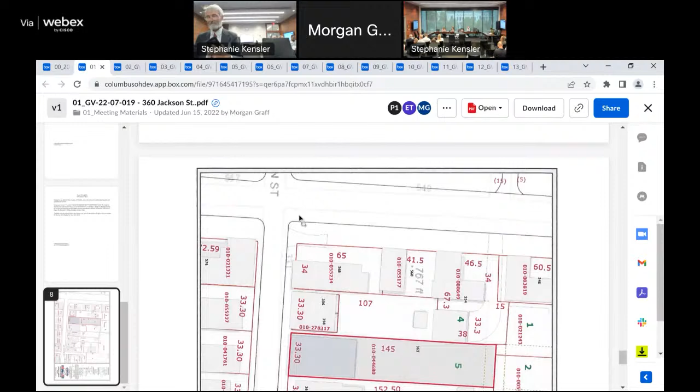Thank you, sir. Morgan, proposed work description for this application is for variance recommendations. They will be CC 3332.031A to allow a 3-unit dwelling structure, CC 3312.49B to reduce number of parking spaces from 2 to 0 for the third unit, and CC 3332.14 R2F to allow a 3-unit dwelling on a lot of less than 6,000 square feet.

Single-family home was converted into a 2-unit dwelling around the 1940s, which is indicated as COA for variance recommendation in 1979, COA number 19475. The existing awning was installed in 1988, COA number 88516. This applicant was reviewed in May and received a recommendation for commission, COA number GV 2204020, after being continued from April. The applicant has returned with an additional variance recommendation needed before they can proceed through BZA.

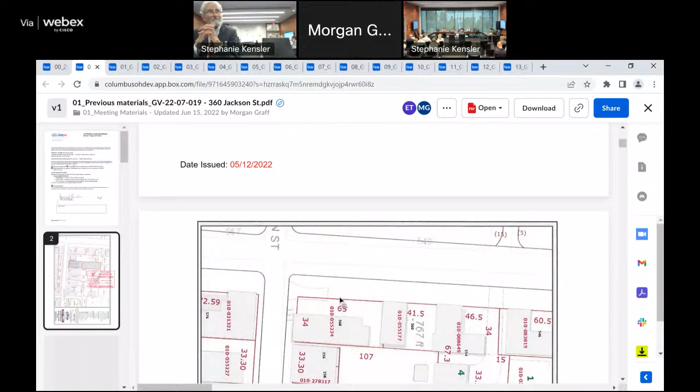The new variance is the CC 3332.14 R2F to allow a 3-unit dwelling on a lot less than 6,000 square feet. Staff recommends that the commission recommend approval to the BZA as submitted. Basis of the staff recommendation is the proposed work is consistent with German Village guidelines. Zoning variances, page 139.

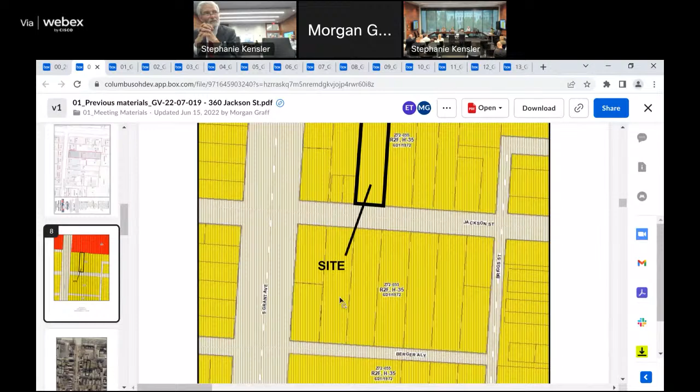Thank you, Morgan. Thank you. Anything to add? Nope. Once again, we were before you in May, and staff had said that was the only 2 variances we need. And as they were writing the ordinance, it went up the food chain, and somebody made a determination, although you all had recommended approval for 3 units on a lot of 0.11 acres, which is less than 6,000 square feet. They said they did not actually vote on that specific variance.

So I'm back in front of you all asking for that specific variance. Essentially the same thing as what we approved in May. Nothing has changed, it's reiterating what was already approved.

Commissioners? I move on application GV 22-07-019, 360 Jackson Street, to approve or recommend as submitted. Second. All those in favor? Aye. All those opposed, same sign. Thank you, folks. You're welcome. Thank you.

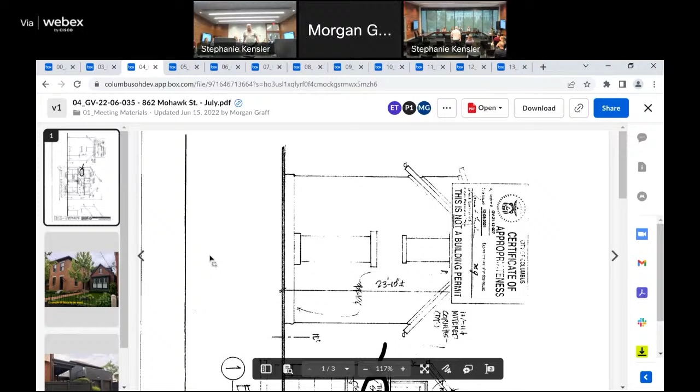Moving ahead to item number 4, this is a continued application, GV-22-06-035, 862 Mohawk Street. Please raise your hand. Do you swear to tell the truth, the whole truth, nothing but the truth? I do. Bill Hugus, architect.

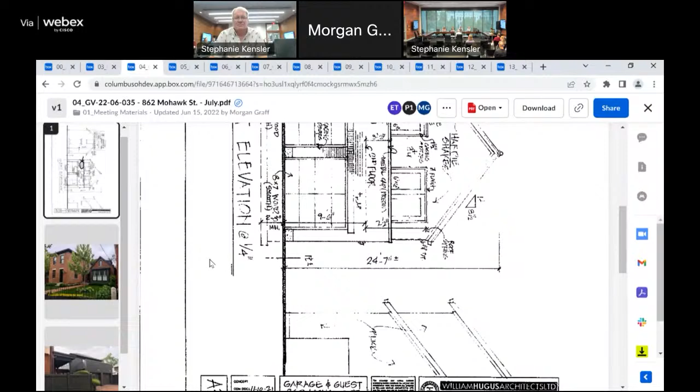Thank you, Mr. Hugus. Proposed work description: a new garage was previously approved in December 2021, number GV 2112-027. Previously approved design included natural brick on the east elevation. Applicant is proposing to paint previously approved brick in lieu of leaving it natural. At the past June business meeting, commissioners asked applicant to clarify what type of brick was originally approved in December 2021. Applicant responded stating that they will be using a thin brick series of Glen-Gery OSU blend.

Staff does not recommend painting brick, though it is part of the new construction. Basis of staff recommendation is German Village Guidelines, Masonry, page 38, number 6. Anything else to add? No, on the original approval I still prefer the natural brick, but there's an interior designer involved now, and she's insisting on trying to find out if we can paint it, because I think primarily she wants to change the garage doors that were approved. I don't know what to yet, so this is the first step in the question.

Questions, comments from the commission? You know, guidelines say don't paint masonry that hasn't been painted.

Questions, comments? Is the fact that it's a new brick, thin brick, have any bearing on your decision? No, because that was the original intent of the material, was to have a brick up there and be the color that it was. My point.

All the neighboring buildings are brick. That's why I prefer to keep it natural, so. And that was the intent originally. Yeah, just like the ones that were built 100 years ago, the intent was. Unless they were soft brick.

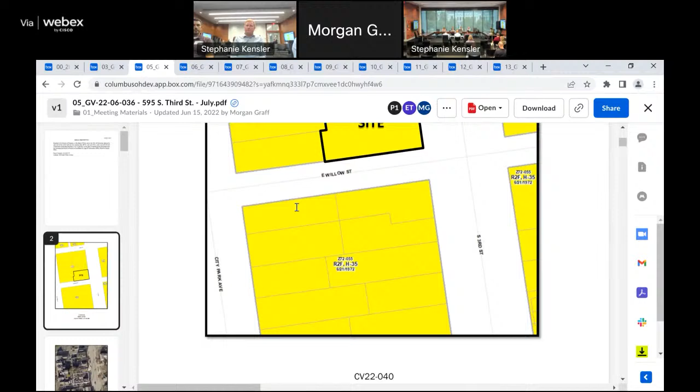332101, dumpster area, to eliminate vehicle maneuvering area for dumpster enclosure. 333218D, lot coverage, to increase permitted lot coverage from 50% of the total lot area to 70% of the total lot area. 3332037, R2F permitted uses, allow office, restaurant, and restaurant patio uses.

333221, building setback, to reduce the building setback from 10 feet to 0 feet from South 3rd Street and East Willow Street. 333225, maximum side yards required, to reduce from 16 feet to 0 feet, existing conditions. 333226, minimum side yard permitted, to reduce from 5 feet to 0 feet, existing conditions.

Outdoor patio design application was originally approved with variances recommended in April 2022, COA numbers GV2204026A and GV2204026B. Application has returned due to additional variances needed as well as revisions to the previously approved variances.

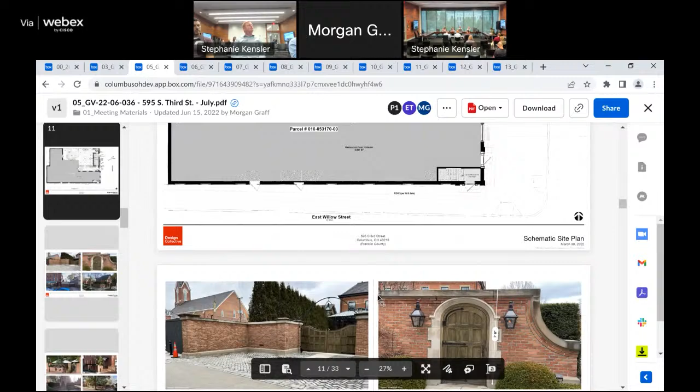The new variances include 333226, minimum side yard permitted, and 333225, maximum side yard permitted. 331249, required vehicle parking, was previously approved but revised to be 77 parking spaces required instead of 73, as well as 333218D, lot coverage, which was previously approved but revised for the existing lot coverage area to be 70% of total lot area instead of 63%.

At the past June business meeting, the Commission asked the applicant to verify if variances 333221 and 333237 were existing conditions. They also asked if the applicant has arrangements for additional parking off-site.

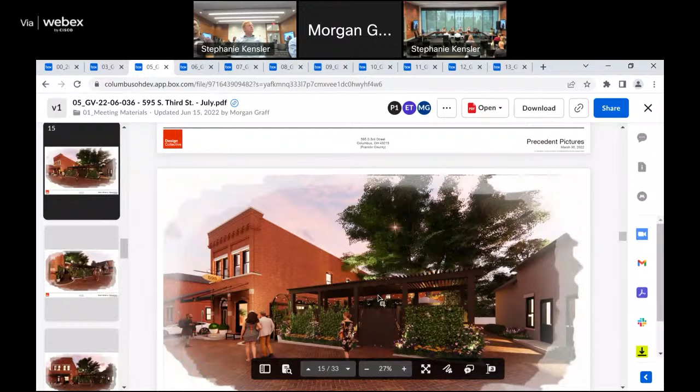Staff recommends the Commission recommend approval to the BZA as submitted, with the clarification that the final submittal packet for the previously approved design and materials be finalized for final Historic Preservation Office approval before issuance of certificate. Basis of staff recommendation is German Village Guidelines zoning variances, page 139: a standards variance grants permission to vary from established development standards regarding setbacks, side yard minimum sizes, and maximum coverage of a building lot.

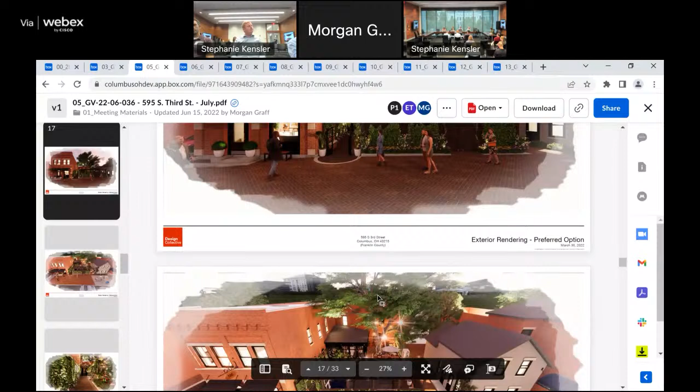Right, anything else to add? Yes, please, Morgan, if you could go to any of the site plans. So what we're presenting today is the same as what we presented to you back in April.

The reason for the increase of parking spaces and building coverage is that originally the laundry area, on the structure towards the front of the building, was not originally included within the calculations. This is to fix that oversight. With respect to the other side yard variances, those are existing conditions that we're just trying to bring in for the sake of clarity and records going forward. Those are the basis for the increased variances we're presenting today. I'd be happy to answer any questions.

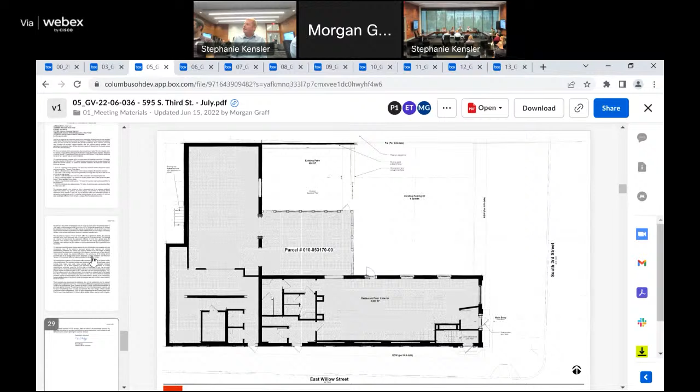I don't know if this is the correct illustration, but you said something was not included in the original. Morgan, if you have any— page 11, I think, is the one you want to look at. I'm not actually in control right now. Oh, my helper is back with Stephanie. Page 11.

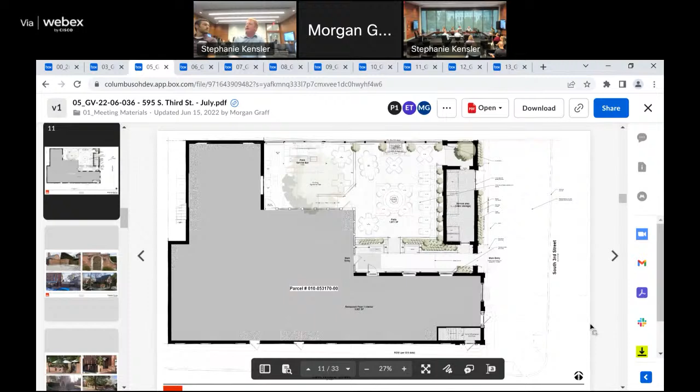So the structure on the right side, it's about 265 feet, and technically it's part of the restaurant use, and it's also building coverage. The variances presented to you back in April did not consider those in the lot coverage and parking requirements. So that's the purpose of this correction today. Okay, understood. Thank you.

But to clarify, the R2F permitted use variance is already operating in that capacity, so it's protected as existing condition. Building setback, existing condition; the side yard required, existing condition; the minimum side yard permitted, existing condition. So really we're just asking for a tweak to lot coverage, the dumpster, and the required vehicle parking change. Correct. Any questions, comments on the proposed variances?

Mr. Chairman, on item 5, GV 2206-036, 595 South Third Street, I move to recommend the variances requested. Second. And clarification to fix the bad calculations from before.

As far as the staff recommended condition about the single packet - we just haven't finalized the design with the applicant yet. We received those a couple weeks ago and we're still in communication on that. So I guess we'd wait to issue the certificate until the design is finalized, and the condition applies then. Yes, if that makes sense.

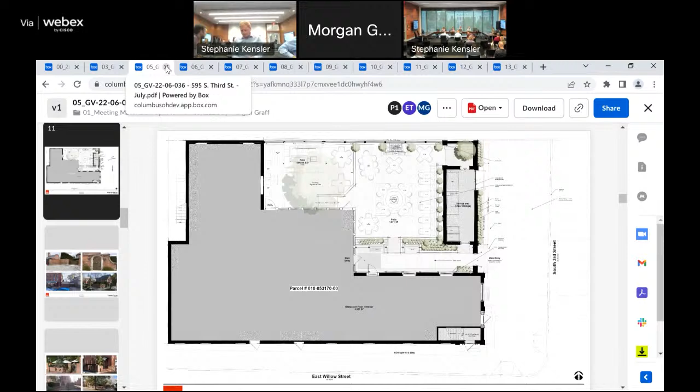All right, moving ahead to item 6, the first new application: GV-22-07-022, 837 South Lazelle Street.

So the applicant and owner are unable to make it, they're actually dealing with something. Okay, that's fine, I heard that you were going to be able to make it, so I apologize. You're welcome, first timers - never mind that.

Sorry, would you please raise your right hand? You swear to tell the truth, the whole truth, and nothing but the truth? Yes. Please state your name for the record. Catherine Matthews. Thank you very much.

Proposed work description is to remove existing Pennsylvania black slate on the south-facing roof. After removal, applicant will redeck the entire face with OSB plywood with new ice guard and felt, and reshingle the roof with nickel gray shingles from the approved shingles list.

Slate assessment has been submitted. The slate on the west-facing roof line on this property was previously removed and replaced with asphalt shingles. Staff was not able to locate an approval of that rear slope removal, but located a COA for an asphalt shingle replacement of the rear elevation from 2016, which was replaced with nickel gray from the approved shingles list.

At the past July business meeting, the commission had requested applicant to indicate north on their site plans to verify which roof slope they would be removing. Commission also asked applicant to clarify if the south-facing removal would include the south-facing slope of the dormer. Applicant responded that it would not be included, only the roof. Staff recommends approval, with any clarifications to be submitted to HPO staff for review and approval prior to issuance of a certificate. Basis of staff recommendation: the proposed work is consistent with 3116.11 standards for alteration number 6.

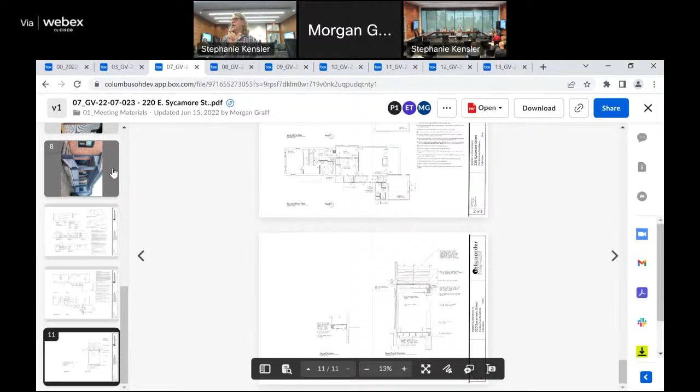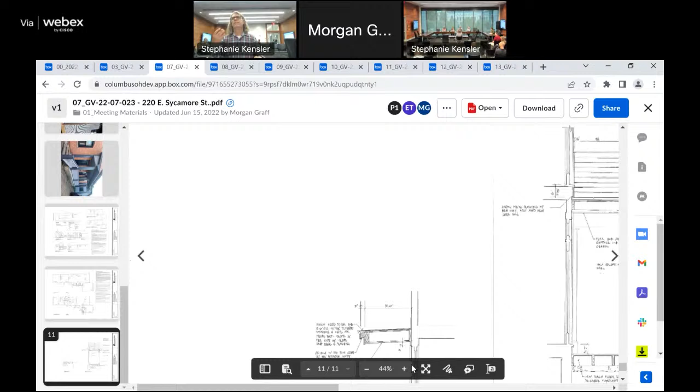Both porches don't have a header detail. So even on the existing porch, we wanted to add a header, column, cap, trim detail, like the section I drew of the rear porch on page 11. Primarily, the reason we are talking about replacing the porches is they are deteriorated and built flush with the existing floor. We wanted to fix some of these things, put the headers on, add a little detail, and change the railings.

And Morgan, were you saying that you don't recommend doing the panels between the windows? Yes, I would recommend keeping it as just what is there. So the idea is that it just reads as an element with the clapboard siding between it, just to add some interest to that element. I would think if we were proposing it new, well, I will let you comment.

Do we have a date of when that addition was put on, just for record? Yes, framed addition from 1979 and 2007. I think the 2007 was with the garage. So there was a 1-story garage and they put a connector piece, then put a second floor on it and changed some of that addition.

Questions, comments from the commission? I agree with HPO, just leaving it as siding without the panels. It just is a big background to the original house in front. The rest of it looks fine. Any other thoughts on the panel?

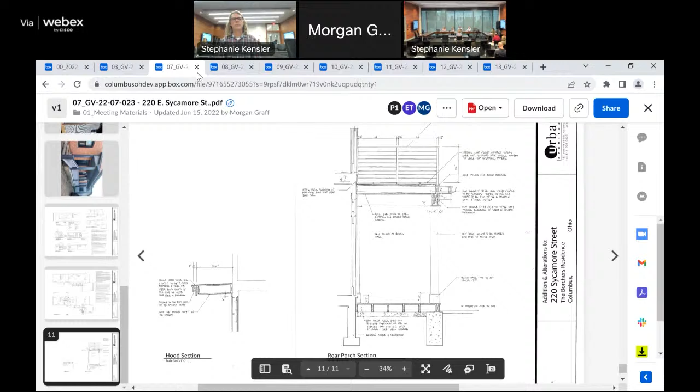Mr. Chairman, item 07, GV 2207-023, 220 East Sycamore Street, I move to approve as amended by the applicant. Second. Questions on the motion? All those in favor? Aye. Against? Abstains? Motion passes. Thank you.

Item number 8, GV-22-07-024, 44 Stimmel Street. Please raise your right hand. You swear to tell the truth, the whole truth, nothing but the truth? I do. Please state your name for the record. Elizabeth, the architect. Thank you.

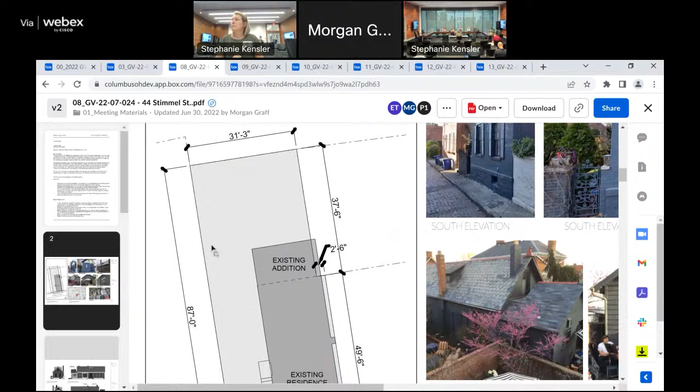Morning. Just a heads up, it's a little lengthy in the staff report. Proposed work description: roof work, construct 2 new dormers consistent with scale, form, and appearance of the existing dormer on the west elevation. New dormers to adhere to GVC guidelines. Replace the existing slate roof with a new roofing material, GAF slate line English gray. Metal ridge roll to match existing. Vault the ceiling and extend the roof over the rear part of the house. This will require the removal of the existing balcony and door on the 2nd floor.

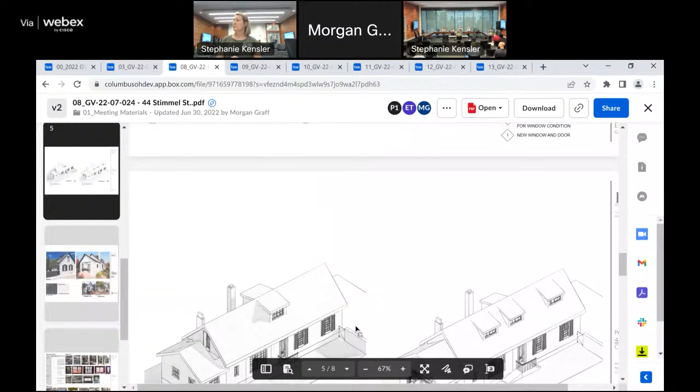Exterior facade work, window replacement. The requested replacement windows are tagged on drawings and will be selected from the approved windows list. Replace the existing north-facing rear door and window with a double door with transom window and 2 side lights from the approved list. Repair walls as needed and keep wood siding on south and west elevations. Repair the exterior and interior spalling brick on the east elevation. Repair the exterior cellar door and cellar stair covers. Repaint entire home. The following is taken from the approved March 2nd, 2022 German Village Commission hearing minutes.

Commissioners indicated support of roof replacement with the proposed GAF slate line. For vaulting the ceilings with the removal of the balcony and door, commissioners wanted to know when the addition was added. Based on applicant's knowledge, the addition was built in the 1970s or 1980s. Based on Sanborn maps, the new addition appears larger. Applicant states the addition is currently over the property line. Commissioners asked for clarification if the balcony door is original or was added later.

If removal of the door is approved, that might be affecting the original opening. Commissioners asked for clarification if the roof is extending or if the applicant is changing the roof line. Applicant states that the roof will be extended. If it will be extending, commissioners would suggest keeping the door lintel if the door is existing and infilling with brick to match. Clarification was requested on which chimney the applicant is proposing to remove.

Commission does not typically support chimney removal. Commissioner Harkey stated that he will need additional evidence to decide if the chimney is or is not original, which may be a potential hurdle. Applicant asked to clarify that only the exterior chimney would need to be retained, but the interior can be removed. Commissioner stated yes, but it should be kept structurally sound.

Regarding the dormer, the commission asked if the proposed dormer is engaging to the peak of the roof. Commission typically requests lowering it at least 6 to 12 inches from the existing ridge. Commissioner Fields states he has no problem with either 3 separate dormers or 1 singular dormer. Wider may be better for additional space.

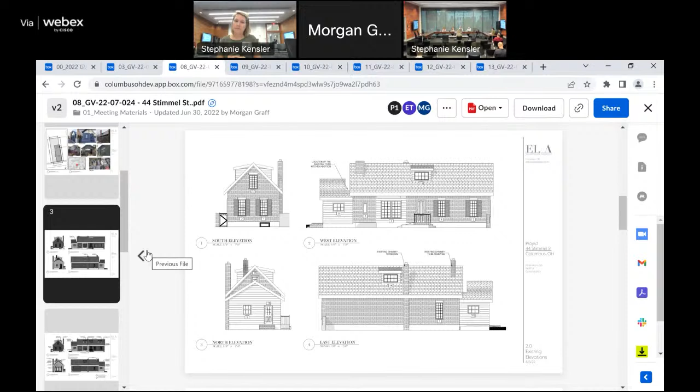Any concerns to the commission about punching holes in the existing slate roof? Not been a concern before. The slate roof's going away. It's one way. Yeah, you're right, otherwise, yes.

But the dormer closest to the street, the one in the back behind the existing dormer, is fine, so we always say put them towards the back. Is that one in the front? It's a very narrow distance between the next house, and this is a very tiny alley, with a lot of vegetation and trees along that side path on the west side.

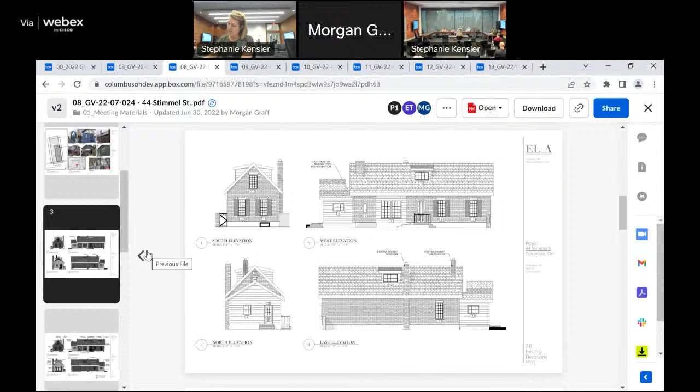Any other questions or comments? The only comment I would have is that I don't object to the paint palette that was submitted with the iron ore. There are other examples in the village, and it looks like the lintels are already dark on the existing sills.

I think the existing black paint was never approved. It wasn't approved? I don't believe it was ever approved. Existing black paint, got it. It was painted prior to that, not the black paint specifically. Correct, it was years ago.

The owner does like the black color scheme, I must say, but I've worked really hard to get another scheme that they will accept. So we would appreciate it if we could go back to an all black, or we could have subtle contrast with some gray, dark gray, and black trim. But we are okay with this color scheme as well, the one we proposed with the white and the black.

Should the lintels be painted more of a stone color? Yes, that would be staff's recommendation, to be painted with stone color. We've been sticking kind of with that rule.

I understand, just for the sake of scale and contrast and a refreshing look, we're not in favor of painting lintels a beige or a big stone color. We wanted to just accentuate the look of it and the Cape Cod kind of feel. That was the only reason. We just weren't comfortable with how the beige paint has kind of turned out on some of these other properties we've been looking at.

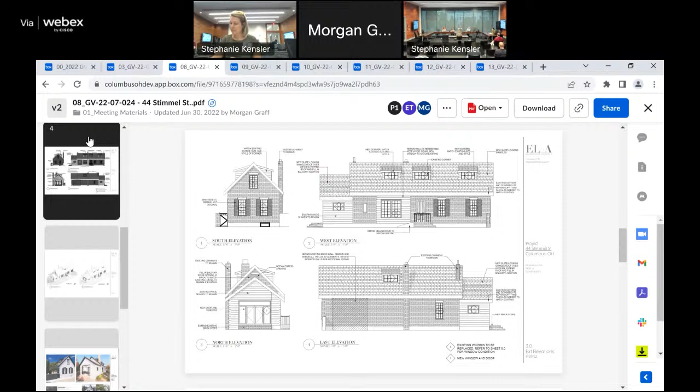Going back to the Secretary of Interior standards, they state that stone should be painted to look like stone, and brick should be painted to look like brick. Our guidelines are pretty silent on color selection. There is some language in the 2008 amendment specifically about additions and new structures selecting colors or schemes that match or complement surrounding structures. Digging back into the existing guidelines for existing structures, I didn't see that same language, but I think the spirit is there.

If you look at the property in context of what's around it, a big black structure is going to be jarring and has an effect on the historic fabric of the street. I think in the same way, a bright white structure with black details does the same thing. We have seen a few examples of that recently. I don't believe we're approving them, but they're there.

I think for the commission, the question is: is it in keeping with the character of adjacent structures? I think the intent is we don't want any one house to stand out, we want everyone to blend in with each other. I've had that conversation with some owners, like, I'm sorry, I know you want to stand out, but you're not supposed to. We don't wish for this house to stand out.

It's just that with a limited color selection the only option seems to be beige. We're trying to find one other alternate solution. That's our request: is there another possibility outside of a beige? So, I mean, we've looked at a lot of colors.

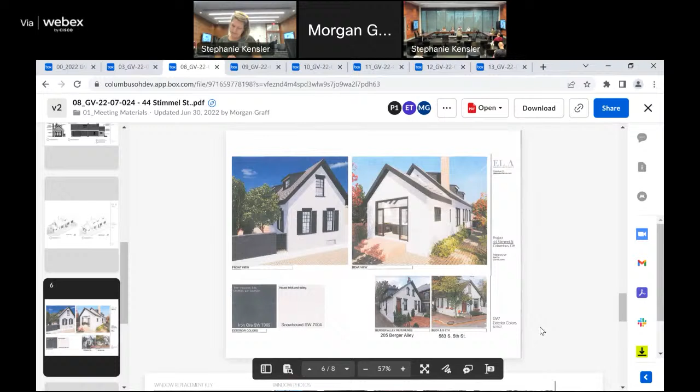All right. Is there a motion? I'll move on application GV 22-07-024, 44 Stimmel Street, to approve the application as amended by the applicant to submit a slightly more medium toned down version of the gray for the stone trim to staff for approval.

Is there a second? Second. Are there any questions on the motion? All those in favor? Aye. Against? The ayes have it. Motion passes. Thank you.

Thank you very much. Thank you. Sorry for the lengthy application. Oh, it's no worries at all. Good discussion.

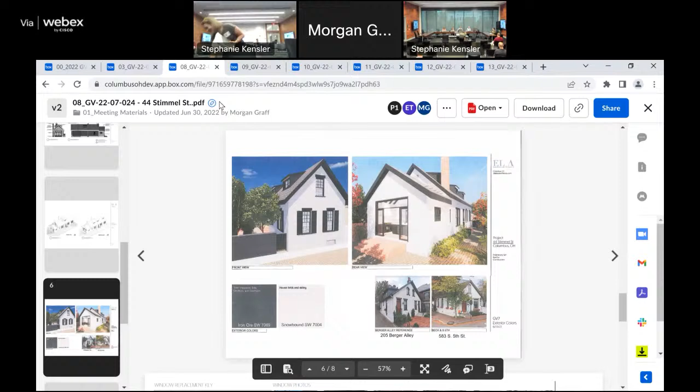All right, moving ahead to item number 9, GV-22-07-025, 804 Yeager Street.

If you please, when you get ready, raise your right hand. You swear to tell the truth, the whole truth, and nothing but the truth? Yes. And please state your name for the record. Brian Straley.

Morgan: Proposed work description - applicant is proposing to remove an existing 25-foot maple tree located in the rear yard. The tree is being proposed for removal before it grows too large and poses a risk of nuisance to the home and neighboring property. At the past July business meeting, commissioners asked what is the risk or reasoning for removing the maple tree. The applicant responded that the tree is at the property line with their neighbors to the north, and is also directly in the middle of the two wires running to the home from the alley, and is touching the wires currently. The applicant plans to plant a dwarf-sized tree in the rear yard as well as produce gardens and native plantings.

Staff does not recommend the removal of the maple tree since there does not appear to be current issues. If removal is approved, staff recommends that a tree be planted at the same location or near the original location of the removed tree. Basis of staff recommendation: 3116-13, standards for site improvements, letter A.

Anything else to add? No, I would just add that our intent is to put a more appropriately sized tree there and contribute to the canopy of the area without it extending and taking over our entire yard and that of our neighbors. Questions, comments from the commission?

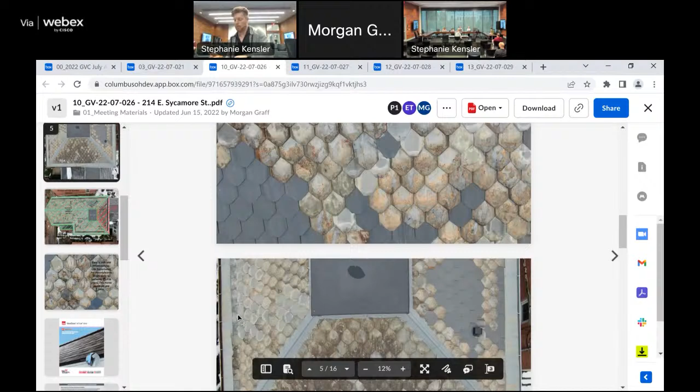To install the GAF Slateline on the rear slope in lieu of the proposed EcoStar will be up for discussion. They stated that the EcoStar was approved as an alternative but was chosen based on a specific color, and was previously approved and installed on the neighboring property, 220 East Sycamore Street. Commissioners asked the applicant to verify the blend color that will be used.

The Commission has also asked if the applicant has considered restoring the box gutters or stock gutters that used to be on the property. Staff has located the COA for the EcoStar synthetic slate that was approved as a test case for 220 East Sycamore Street in 2018, COA number 18841. The approved color mix included Manhattan, Midnight, Freeport Federal, and Saranac Smoke.

Staff recommends approval with any and all clarifications to be submitted to HPO staff for review and approval prior to issuance of certificate, with conditions that applicant install the EcoStar Empire Beveled Edge shingle on the north facing slope in lieu of the GAF Slateline shingle. Proposed work is consistent with 3116-11, standards for alteration number 6.

Anything else to add? That was it. Questions, comments from the commission? So are we replacing the north side or not? Yes, so Dr. Maines was requesting that we replace it with the GAF Slateline to match the rear elevations on the addition from appearance.

That was something that was discussed. We actually discussed it with the GVC architect. They proposed it. So the reason to replace that slope with asphalt shingles is to mirror the appearance of when you're standing in the backyard. Yes, yeah, so it's a consistent appearance from the backyard. So we're trying to make the original house look like the addition.

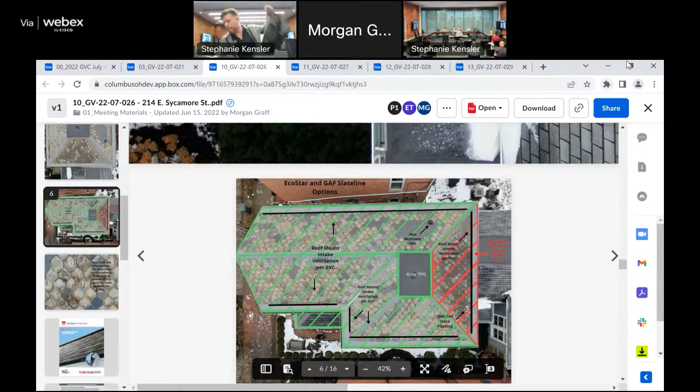Real quick, before we jump to item 11, we did have one that we jumped over. Is anybody here for item 3, 74 City Park? All right, hearing none. Item number 11.

GV-22-07-027, 757 and 767 Macon Alley.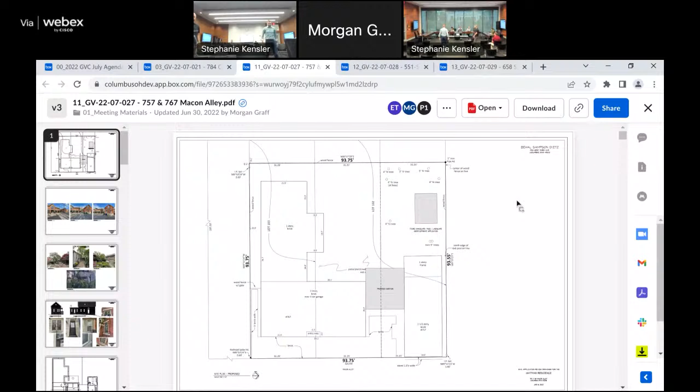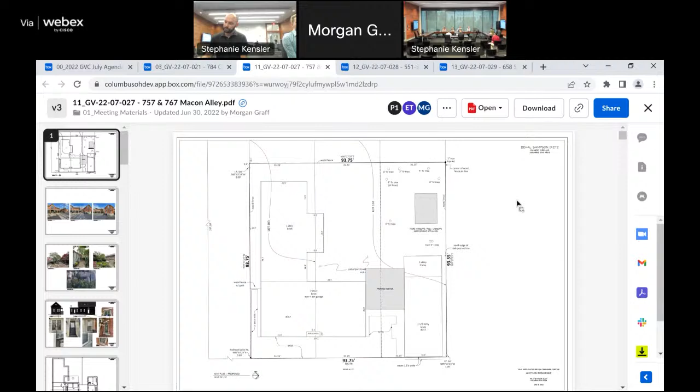Second. We did a refresher. Proposed work description: new construction of a 1.5-story addition to connect the two separate homes at 757 and 767 Macon Alley. The addition will be set back from the existing alley. Proposed addition will be wood or board and batten siding, including appropriate skirting, trim, and corner boards. The addition has a low slope dormer on the rear west elevation and a small dormer with a gable roof to break down the scale of the connection.

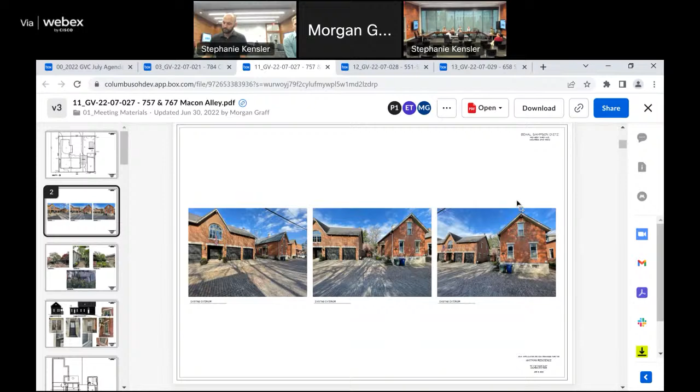Exterior will include GAF slate line shingle roofing, Marvin signature ultimate clad windows, metal OG gutters to match existing, and classic rock molded block foundation.

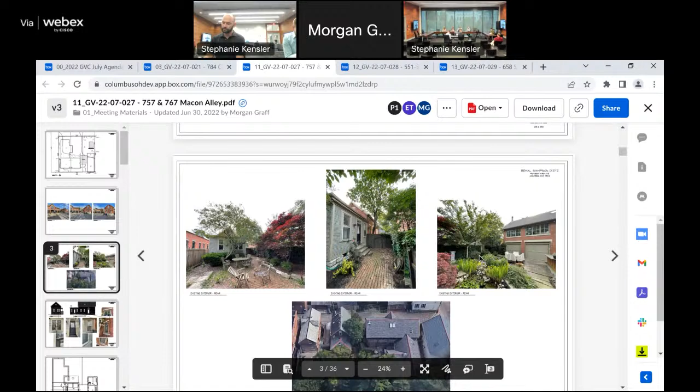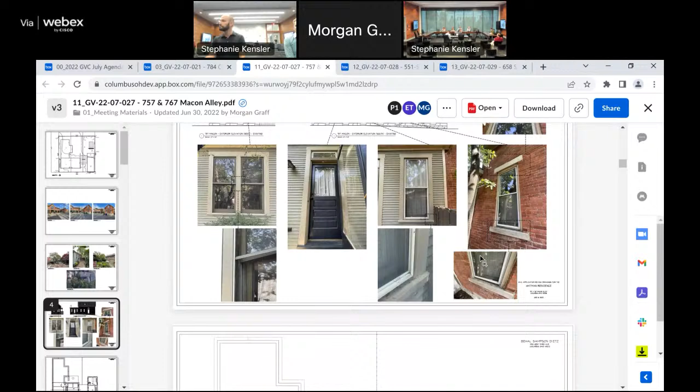This is also for variance recommendations. CC 333225, combined side yard: reduce combined side yard from 16 feet to 7.1 feet. CC 333221, frontage: preserve the existing non-conforming building eave that is 1.1 feet over the lot line into the right of way. CC 333226, minimum side yard north: reduce the minimum side yard permitted from 5 feet to 2.1 feet.

The following is taken from the unapproved June 1st, 2022 German Village Commission hearing minutes. Commissioners had asked at the previous hearing the date of the framed addition. The applicant was able to find more information and it can be dated between 1901 and 1920. Commissioner Foley asked what the back portion of the L-shape at 767 Macon Alley is used for. The applicant stated that it's the primary residence.

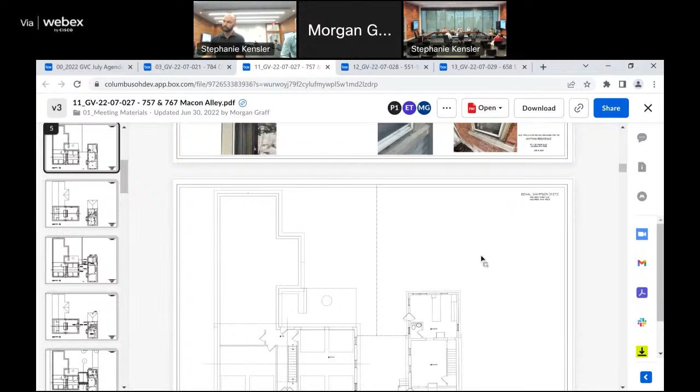Commissioners are having the issue of attaching a residential property to a garage, but the garage structure is residential property. Commissioner Ferriel stated that attaching the 767 Macon Alley structure to the historic 757 Macon Alley structure would make the historic structure subservient. There are examples of homes being connected, but he doesn't think there have been occasions where the larger home was so much bigger and such an unusual structure that it probably should have been built that way to begin with. Also, the homes are so far apart that the connection would be hard to hide.

Commissioner suggested sending in a 3D rendering to show the colors and depth of the connector addition. Commissioner Field does not recall the comment about the proposed dormer on the front elevation of the connector being inappropriate. He was surprised to see it gone because it broke up the eave line and broke up the connector.

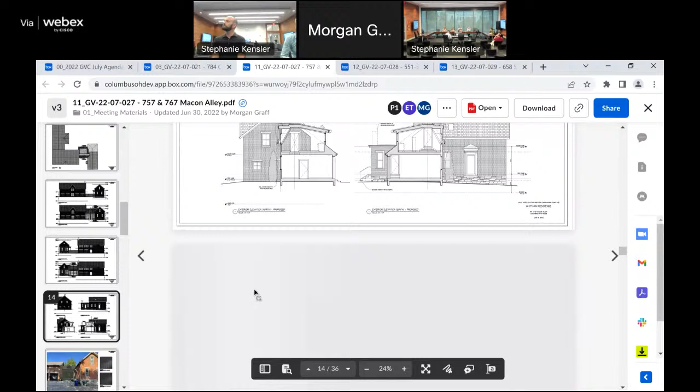Commissioner stated that there's something about the solid wall that makes the connector feel massive. The window above and below gave it more of a vertical element. Commissioner would like to see it as a 1-story addition rather than a 1.5-story.

Commissioner Harkey did not have an issue with the original proposed dormer since the addition is 1.5-story, and typically dormers sit back further, not flush with the facade. Commissioner suggested making the eaves subservient and not lining them up, and recommended setting the addition back as far as possible from the existing structures. Commissioner Harkey recommended lowering the roof line on the connector.

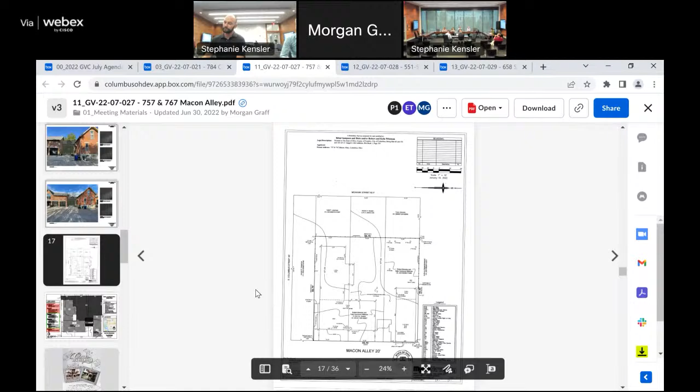Commissioner Field states that his issue is the scale of the original 767 Macon Alley; creating more appropriate massing and cutting the building apart aesthetically might make it work better with the proposed connector piece and the historic property. Maybe add architectural elements above the garage door to break up the massing. Connecting the two separate structures is hard to overcome architecturally.

Commissioner suggested setting it back further and coming off the roof of the single-story addition off the rear. At the July business meeting, commissioners asked the applicant to include additional 3D rendering to show the overall elevation, including the rendering and elevations of the two properties that will be connected.

The commission stated that they will need to discuss the design further at the hearing. Staff notes that this application may set precedents for the commission to allow a combination of separate lots and connectors between two separate properties. This combination would also be a loss of a single-family home in the neighborhood and redefine the context. Staff would also like to note that the commission was against the removal of historic fabric for the rear single-story addition at 784 City Park Avenue at the past April hearing.

Staff does not support the design of connecting two separate properties. Staff recommends the commission offers feedback on the design and recommends to continue the application.

Basis of staff recommendations, 3116.11, standards for alteration. Number 1, every reasonable effort shall be made to use the property for its original intended purpose or to provide a compatible use requiring minimal alteration. Number 2, the distinguishing characteristics of the property should not be destroyed. The removal or alteration of any historic fabric or distinctive architectural feature shall be avoided whenever possible. Number 10, whenever possible, a new addition or alteration shall be accomplished so that future removal will not impair the essential form and integrity of the structure.

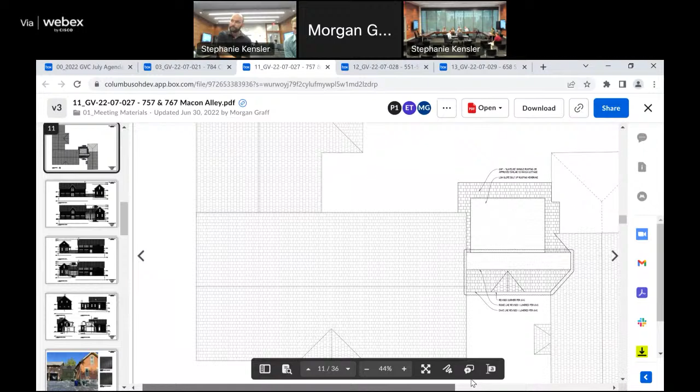I mean, if you look at the roof line, let me find a view. On page 8 of the application, right now it's almost... 8 to 9 shows the change. Yeah, so basically it's taking a block, dropping it in between the two.

If the second floor could kind of wrap, whether it goes over top of this garage door off the back, does an overhang back there, that gets you your second floor across without tying into the first floor. To me, I think it's an architectural issue, and don't let the desired floor plan drive the architecture, let the architecture drive the floor plan.

So what if the connection over the existing cottage was more of a dormer than a gable end? We allow dormers all the time. Coming off the side, you're saying? Yeah.

But once you have a dormer, the architect would have to figure out how to fix that, but if that would start to relieve some of your concerns - and I understand your concerns, I really do, I'd have to see it - I think once you take a dormer and turn it into basically a connection, it ceases to become a dormer.

Unless it still reads as a dormer, that architectural setup - that's the architecture, that's why you have architects. So the absolute minimum connection would be build a little 3-foot hallway off the older building, just connect it straight over and bust a new opening at 87.

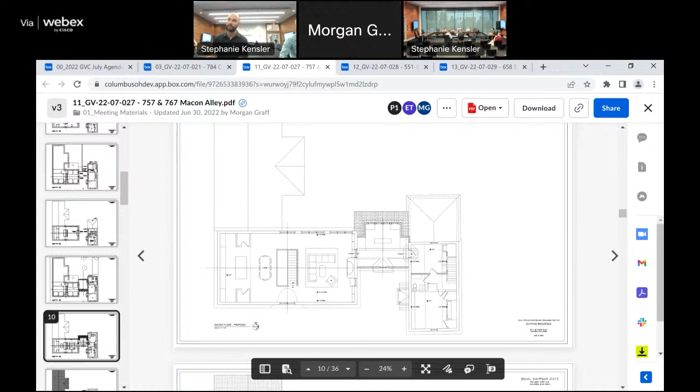I'm thinking of your comment, kind of the combined comments of the addition and to not hurt the historic corner—I know this is now going in the opposite direction. Literally, if the addition was to move forward to read more as a true addition to that cottage off of the side there, coming forward towards the porch, what would the commissioner's thoughts be on that?

And in our mind, we're thinking of a clean roof line, which typically is the result of a clean design thought out on the inside. I think the further we get off of that rear and trying to loop around it, it almost seems like too many gymnastics to address one item while hurting a series of other ones.

So the guidelines say the addition should be in the back, should not be as wide, should not cover up as much of the historic visible. And that's, I think, where Anthony's coming from. Okay, pushing that back and keeping that off, but trying to make it a true historic L-type structure is problematic for that reason.

I've got no problem gobbling up the corner of the '87 building. It's the '87 building, it's already got its own issues, but...

And there's—I'm gonna say this—there's been single story cottages, and this tends to be more of a story and a half. But single story cottages, I think of one on Fifth, and on City Park, that have had additions strictly out the back but have extended beyond the side, so still keep that connection off the back and then just bring it further off of the historic.

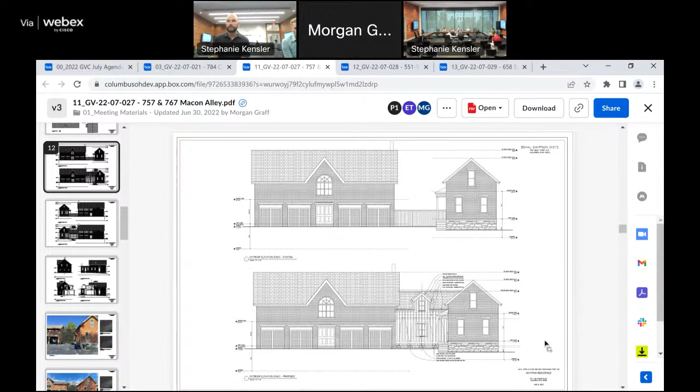That was, originally had a similar dormer, it was a little bit larger. We had misheard a comment that the dormer should go away, we removed it, but the comment was actually looking at setting the dormer back in a more traditional fashion. In bringing the eave roof line down as much as we have,

we don't have the room to do a step-back dormer. The connector's gotten so small at this point that we're almost getting that much closer to a one story, and being able to have a window that isn't at your ankles - it may not show through in the elevation, but everything has been snugged down as far as it could go with this instance. I think the dormer's very successful.

So Andy, do you think it would work to expose that historic corner, if it was literally just this 5 feet wide? If that was the max? To me, it's just - how do you, I mean, it would still be an addition to the historic building, still engage that historic roof. Yeah. But I guess it would minimize the footprint to basically the core.

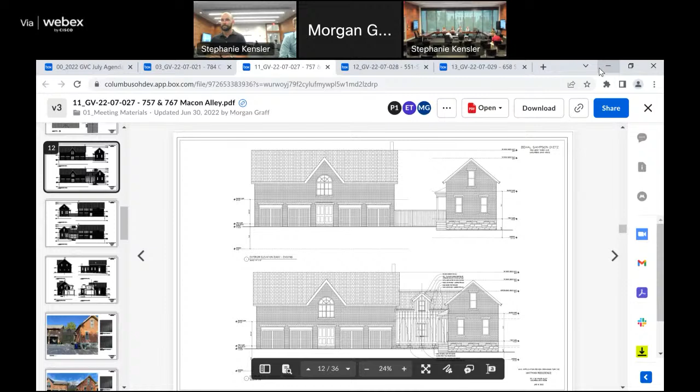Mr. Chairman, on item GV-22-07-027, 757 and 767 Macon Alley, I move to continue. Second. Any questions on the motion? All those in favor? Against? Ayes have it, motion passes. Thank you.

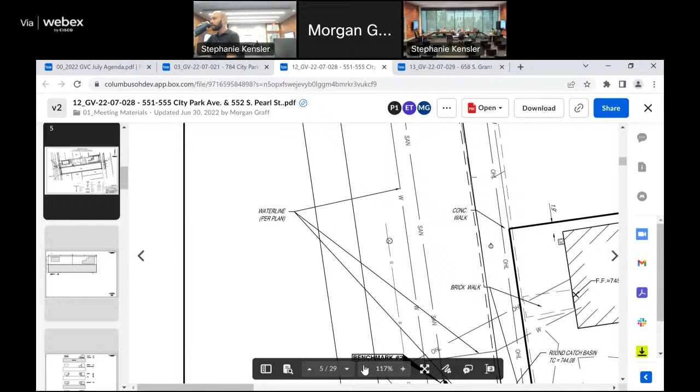555 City Park alterations: remove the existing Old World Bazaar entry and bay window additions and restore the historical masonry openings. New metal and glass openings and entryway are proposed. Repair of masonry is required on all elevations. Replace the Old World Bazaar storefront and entry on South Pearl Street with historical warehouse doors that will act as garage doors. 3 shed dormers are proposed for the middle section of the building. Replace the damaged slate roof with a new standing seam metal roof, 18-inch spaced seams.

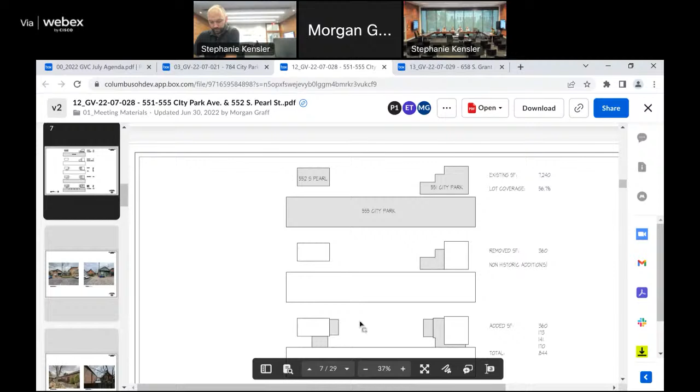New masonry openings are proposed on the north facade of the building, facing the interior of the parcel. Metal glass windows and doors proposed for these openings. Change of use from commercial to residential. Renovation of the interior for residential use. Step back single-story connectors proposed between this building and the two adjacent buildings to the north. Remove masonry walls and bench in the right of way in front of the building on City Park Avenue.

551 City Park Avenue alterations: replace all historical siding and trim with new to match. Replace windows with new Marvin windows from approved windows list, maintaining all existing opening locations on the City Park facade, including dormers. Remove rear additions made over the years to the original structure. New slate roof proposed. Renovation to the interior, no problem. Addition to the rear of the original structure, including a screen porch. Paint color to be determined.

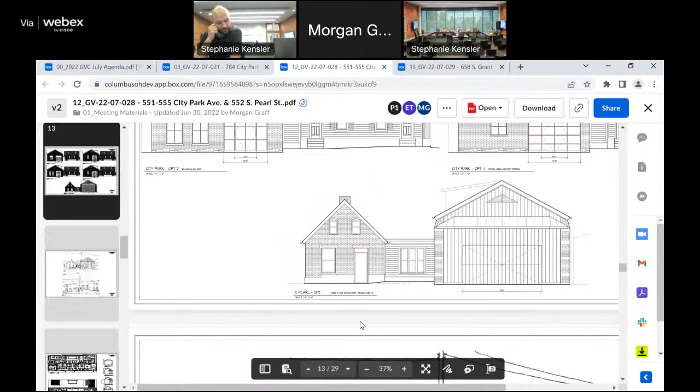For 552 South Pearl alterations: repair existing masonry as required on all elevations. Repair existing slate roof. Replace windows with new Marvin windows from the approved windows list, maintaining all existing openings on the north and south elevations. New front entry door selected from historical style. Renovation of interior. Step back single-story connector to 555 City Park Avenue. Maintain off-street parking spot. Proposed iron fence along South Pearl Street, including gate for parking spot, and a new 4-panel solid wood door. Variance recommendations for this project.

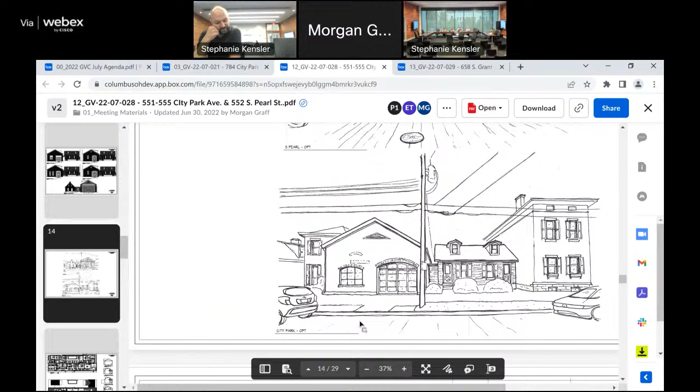CC 333218D, lot coverage: increase permitted lot coverage from 50% to 60.5%. CC 333221, front yard setback City Park: reduce the front yard setback from 10 feet to 0 feet, which is existing. CC 333226, minimum side yard north: reduce the minimum side yard permitted from 5 feet to 0 feet. CC 333226, minimum side yard south: reduce the minimum side yard permitted from 5 feet to 0 feet. CC 333225, combined side yard: reduce the combined side yards required from 12.5 feet to 0 feet. And 333227, required rear yard: reduce the required rear yard from 3,162 square feet, which is 25% of lot area, to 961.15 square feet, which is 7.6% of lot area.

And 339111, voluntary discontinuance of non-conforming use. Approval will be required, but will need to confirm with BZA. All properties included in this application are contributing structures that include 2 residential and 1 commercial building. The commercial building has remained such since construction in 1901. The building was originally a trolley barn, converted to a grocery warehouse, and then the Old World Bazaar in 1968. The combination and connection of these 3 buildings will be the loss of 2 single-family dwellings to the neighborhood.

At the past July business meeting, commissioners requested that a demolition plan be included with the application. They asked if the applicant could clarify if the sign is being removed from the facade, and to identify the square footage of each property to help identify the increase over 60% for the lot coverage.

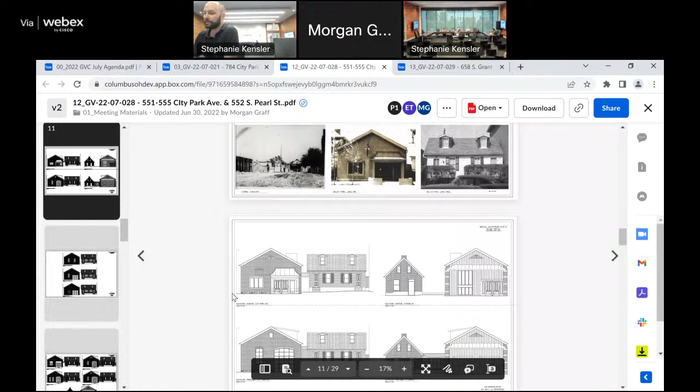Is your concern with increasing any amount over it? From what is existing, 50 to 55 has in the not too distant past been the rule, and there's been a feeling that going over that was not where we wanted to lose open space.

And I believe the enclosed connection on the City Park side — in our proposal of removing the older non-historic additions that are on the back of that, the proposed addition is the same square footage within, I believe, 2 or 3 feet. So that's something for us to take into consideration.

Photos of those additions to be removed might show more detail. On the photo sheet showing the interior lots just before the historic ones, you can see a good amount of that addition. Down two more pages, the green building — yeah, it's the green off the back. Looks kind of old.

Those ones, in looking at it without doing any demo, are on — it's not a rubble foundation like the original historic cottage in the front, it's an older block addition. And in looking at the Sanborn maps, those didn't exist during those periods.

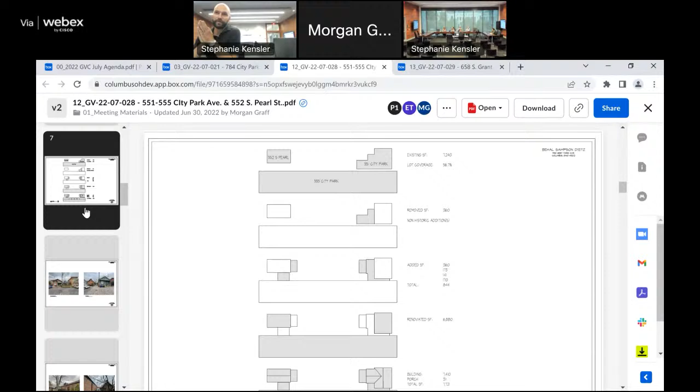I could almost say I'm fine with all of it if we were just able to keep that historic cottage sort of intact as well. Yeah, we can look at confirming those details to address that. It's like, how big of a bathroom do you really need? How big of a closet? Can it just fit in the original massing?

So on the rear of 551, which I guess originally was 549, 551, look at the Sanborn map, the 21 to 51 Sanborn map, last page of the application. You've got the side-by-side duplex. There's a one-floor bump out on the back.

Go back to that photo on page 9. You look at how you have the leg that comes out the back, and there's a little piece right there. Is that part of that bump out? You do some investigation of the foundation, and that might be the remaining part of that little bump out, which would make that historic component.

How historic, and how much we want to maintain, is a discussion for the commission, but I want to identify what that is—is it the original piece, or was it originally torn down and a new foundation put up, with an addition there.

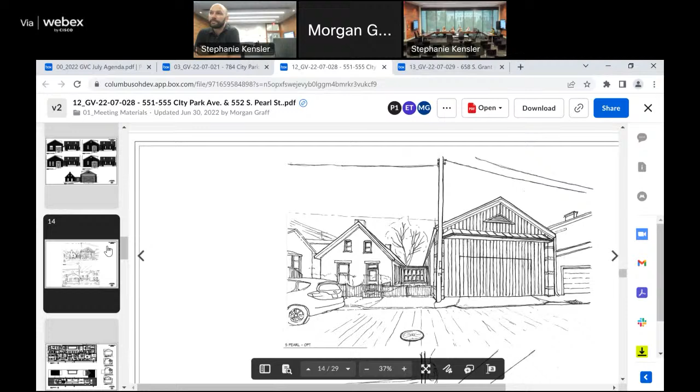Does it have pilasters on that north wall? Yeah, there's pilasters on the north and the south. Oh, okay, and they're only on the exterior. There's larger pilasters on the South Pearl elevation, but there are not any on the city park side. But the bays are all still the same arching.

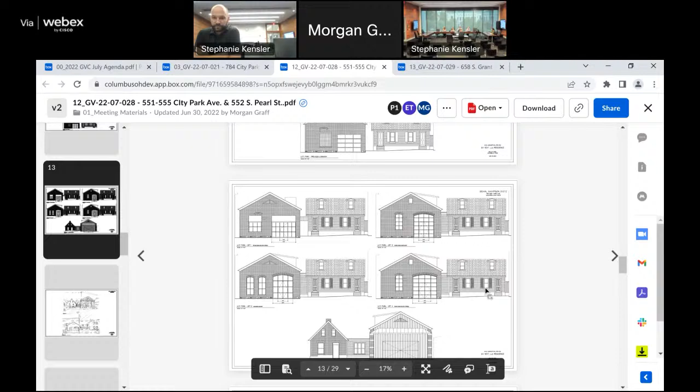So in the living room, dining room area, you've taken out the whole wall from basically pilaster to pilaster. I believe we left 8 to 12 inches on the edge of that pilaster to let that original wall remain. Okay, so you just put in a storefront wall. Correct. I'm just wondering if that's a better solution—to carry that all the way along rather than just cut masonry openings in, take the whole wall out and replace it, rather than the punched openings. Just storefront all the way down, and you could treat the glazing differently, whatever you needed to do with it, but just have the same.

I'll make one observation.

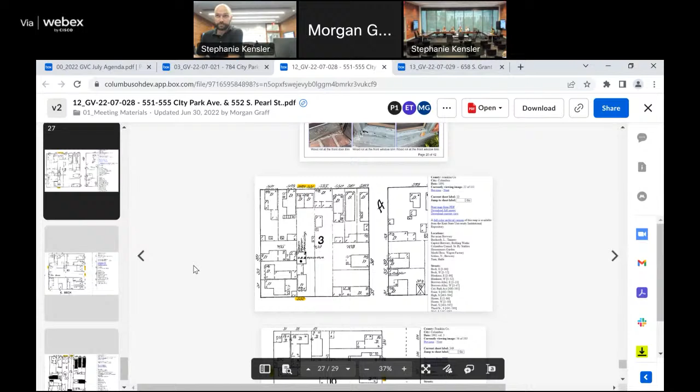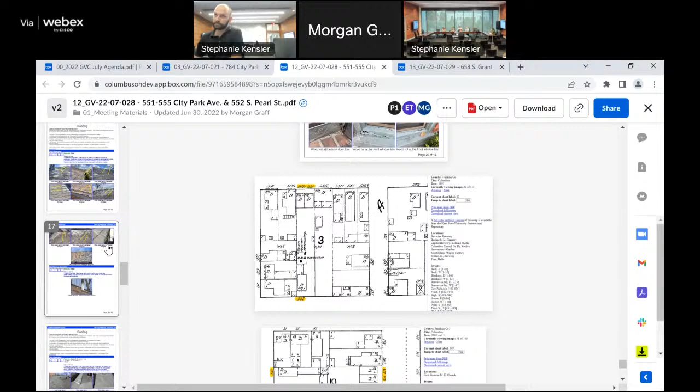If you look at the original 1891 Sanborn map, there is a 1.5 story structure up to the property line on City Park. It extends back roughly halfway, or a little more, the depth of the duplex at 551, with some 1-story additions off the back. If you look at where your pilasters start, they interestingly start at that same location. So the fact that there's no pilasters on the front elevation of City Park has me thinking that front portion could be original from 1891. Look at the foundations and where those pilasters are and how it ties together. You see differentiation there. It may be identifying that's the oldest part of the entire structure.

If there was an arched opening somewhere on that portion, it may have been an old window from the original house that got bricked up when it became a trolley barn, which may explain that arched window at the front of the barn. Then that garage door may have been a whole new opening cut in for the trolleys when it got converted. Yeah, from what we could tell, the trolley line came in through the South Pearl elevation and ended within the City Park boundary, so it didn't continue through as a pass-through.

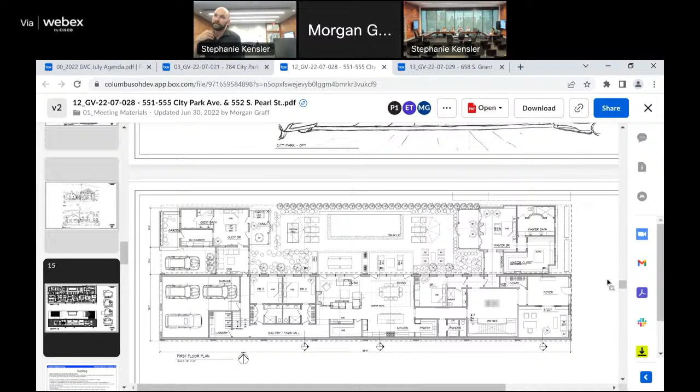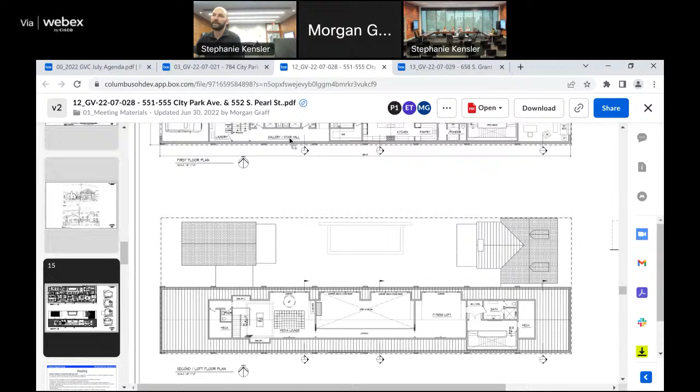Are there any questions or concerns with the proposed roof work currently on the City Park side? The duplex is slate on the front, with 2 slate dormers, and then the back of that historic structure and the addition are asphalt. We're proposing that the original historic structure would all be repaired or new slate, and then any addition to that would be differentiated.

Then on the South Pearl side, that small cottage - we incorrectly listed it as slate in our write-up. It's actually an asphalt shingle that's also at the end of its life, and that's also being proposed as slate. And for the trolley barn, it has the original slate roof from around 1891, maybe the oldest, which is being proposed as a standing seam metal roof.

I've got no problem with the concept of those roofing materials. Okay, no.

I do find it curious on the Sanborns you didn't have a gabled end - actually, what's their technical term for that type of roof. Yep, yep, yeah.

There is a photo online on Passport for Columbus Neighborhoods showing them actually adding roofing to make it a gable end - the extension. So that explains that shell line, the spring line. It looks like at some point it went from a hip roof to a gabled end, and then that gabled end got extended and beefed up.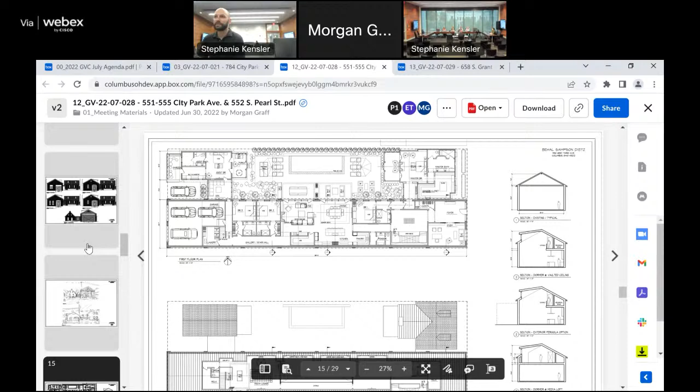With that, one of the photos, the one from High Street, you can almost see an old roof vent on top. When you look at the roof from above, you can see it likely had, I think, 4 others, following the cadence of the pilasters. But you can see from above where those old ones have been patched in. Talking about the ventilators? Yeah.

That same photo gives us the most amount of info, but it's also the grainiest. It looked like there was a vent louver on that South Pearl elevation of the trolley barn - it's hard to make out. But with that, the 2 triangular vents on the trolley barn now aren't functioning, they're just stuck on to the face of it.

If you look at the aerial photos, you can see the color splotches where it got patched. Yeah.

And while we're on the roof, we also propose removing the mechanical penthouse on the trolley building now that we're proposing getting that equipment out of there. In that same vein, we're proposing 4 interior dormers.

Those follow the cadence of the pilasters. They face internally to the shared lot courtyard, but aren't visible from any of the neighboring streets. We'd likely pull those back from the original brick face and detail them accordingly.

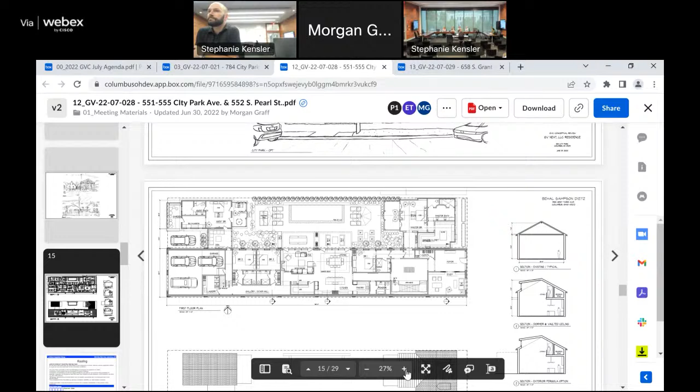You've got a garage here, a drive there, too short for a parking spot. Typically we don't allow curb cuts unless there's evidence of a curb cut existing in the past. For the trolley barn, there is evidence of that, and it's not taking away any street parking since there's already no parking there.

I think some of the concern in the meeting was about an attached garage. But if it was the trolley barn and you had openings—that's like that house on Mohawk Street where they just put the garage in the basement. It's in the volume of the building, it's not attached, and that one had room for 20 cars. In this case, you had vehicle entrances here historically, so.

We welcome any feedback on how we treat that curb—whether it's recessed sandstone or everything related to the brick there. Also whether it should be two separate doors to break up the curb cut and reduce it, or the opposite route, a single larger door to reduce the width of that curb cut instead of two separate ones, which makes a few feet of difference.

My opinion is you take it from one edge of the existing curb cut to the other, and it would be nice to have a sandstone inset just to historically read that there was a curb here at one point in time. I think you've got to do that.

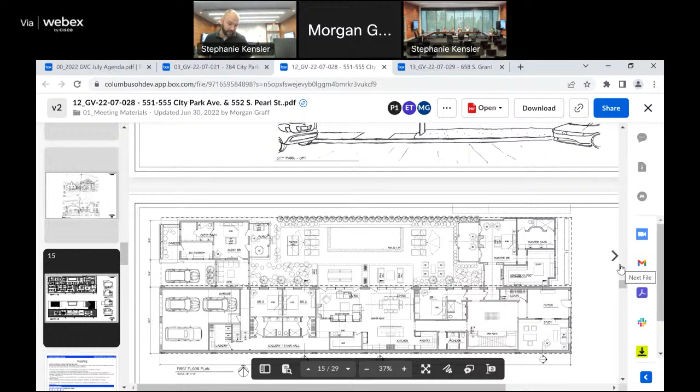And you said the Pearl Alley side had a wrought iron facade or something? In one of the Sanborn maps, the 1901 one just says 'ironclad' on that end. So we were scratching our heads on what that was—a gate, larger operable iron doors? I could really see the whole end just being open and never closed.

When it was the original trolley barn? Yeah, when it was the trolley barn they just drove them in there. They wouldn't have heated it.

Okay, I think you guys have answered a lot of great questions, and from our end the biggest concerns we're hearing are a little more information on the trolley barn city park facade, and looking at those connectors to try to reduce those as much as we can, both out of respect for the existing cottages and down the road for any lot coverage variances.

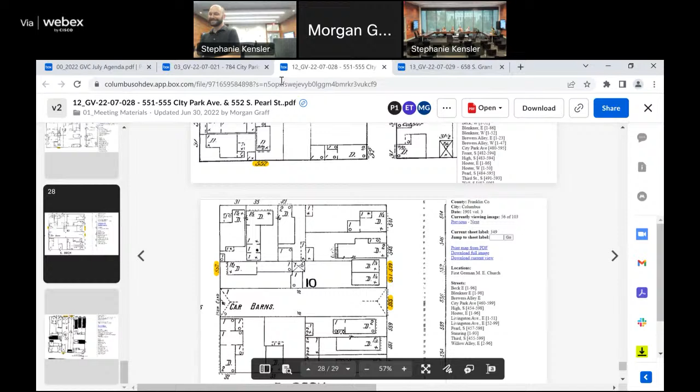All right, no action needed. That was conceptual. Last item, GV-22-07-029, 658 South Grant.

If you'll raise your right hand, please. You swear to tell the truth, the whole truth, nothing but the truth. I do. Please state your name for the record. John Nicholson.

Proposed work description: applicant is proposing the expansion of an existing dormer and addition of a symmetrical dormer on the opposite side of the home. New dormers will allow for proper minimum ceiling heights on the second floor. The dormer will be held back from the street facade and will step back from the side of the home. Existing house footprint will remain unchanged and no variances will be required for the project.

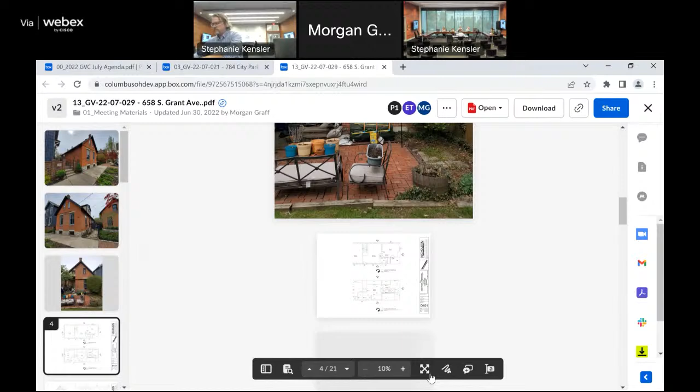At the past July business meeting, commissioners asked preservation staff to look at past comments made by the commission about the dormer on the Mohawk property that was used as an example. Staff has included the information within the materials and has located the information for the dormer at 753 Mohawk Street.

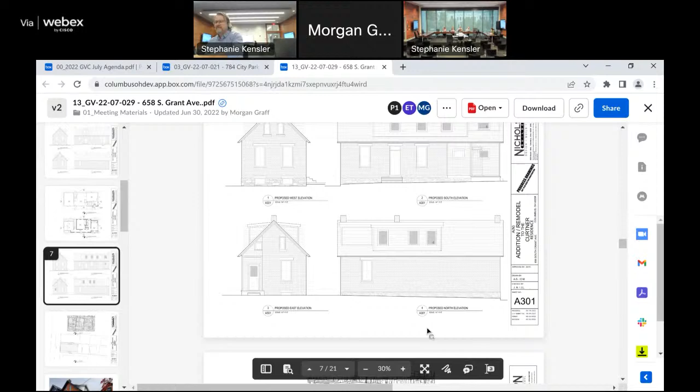The south facing dormer on the property was constructed in 1990 without approval or permits and was denied when seen by the commission. It was then appealed in 1991 and 1992, and in 1992 was approved due to economic hardship and with a revised design. Staff could not locate a COA for the north facing dormer.

Staff recommends the commission offer design feedback that can be utilized by the applicant to further refine the proposal for review at a future GVC meeting. No action is required.

Anything else you want to add? Not at this moment, I'll respond to questions. So you're saying the existing dormer was built even after it was denied? Yeah, so appealed based on economic hardship rather than take it down. Yeah, the north one was there already and the south one was built in 1990, and since it was already constructed, it was just revised to be minimized from the front. Had some interesting owners, we'll just leave it that way.

Okay, so I'm missing something. On the as-built north elevation, there is no dormer. Correct, so it's just the south elevation, the single dormer was added on its own. No, her comments were about the house that was shown as a residential example — the comments were about the examples they cited as precedent. Oh okay, gotcha. But the 753 referenced Mohawk — I could not find a COA for that, so that was probably constructed maybe in the 60s.

So I think that was our precedent reference for an extreme situation of exceeding the recommended or allowed dormer length, and we have a reduced percentage of length in our proposal compared to 753 Mohawk. Yeah, I could not locate a COA for either dormer, either side of that property. But I will say for that property, 753, there was an addition to the back and rear in 1970, and I think dormers were indicated as being there on the property.

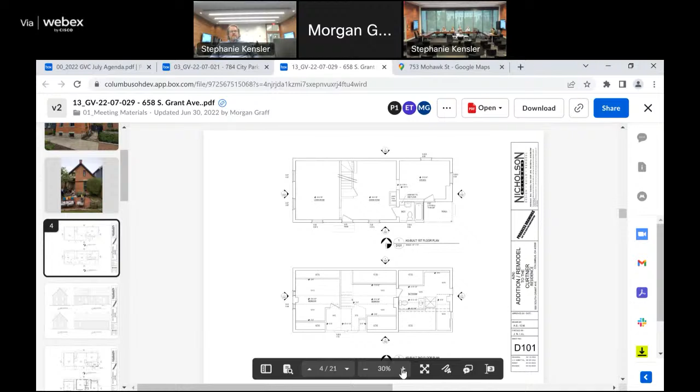So if the door to the office was a barn door - I don't even know if you could do this, a barn door on the interior of the office - couldn't you move the opening closer to the top of the stairs, and you could reduce the length of the dormer?

I think you still wouldn't have the head height coming out of that door. But it would reduce the length. Yeah, by like 4 feet.

Well, the dormer length, I don't think you would go completely away. I think what you end up with is, when you look at the south elevation, you got that dormer piece that's kind of pushed back. So you got the big mass length, and the end piece pushes back. This portion is just going to end up pushing back. You're still going to have the linear length, it just won't be monolithic.

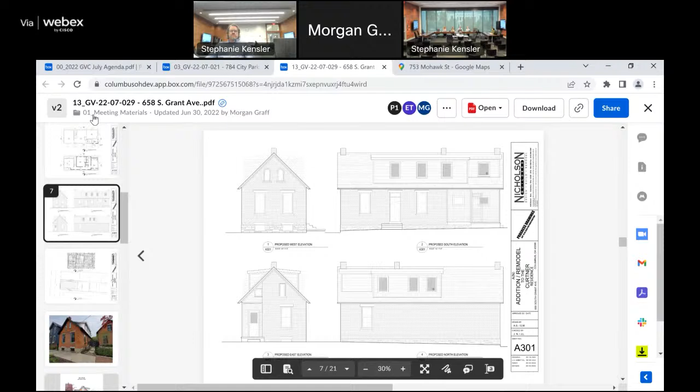I mean, if you have a cut section through there, you'd see it clear. Yeah, I mean you look at the window heights - you try to put a door right here, you're going to be poking out of the roof. It's the small cottage problem. Only has room for so much space.

Dormer it, you lift it, you end up with - best to figure that out before you purchase.

That goes back to the amendment, 2008 amendment, the guidelines on additions: before considering an addition, explore other options such as rearranging interior space, using basements, or relocating to a larger house - which in today's economy isn't necessarily the best solution, which then takes the applicant down...

...the hardship route. It's not plausible for relocation, and the hardship route is not something that we hear at first blush. It requires a hearing, a rejection, and upon appeal. So I don't think having not enough space is a hardship, right?

I'm not saying it is. I'm not saying it isn't. I'm saying maybe there's a case to be made that with the housing market the way it is... is it a hardship? I can't say. It's subjective, we don't know. Yeah, they're financial - you don't submit financial data, income.

I would venture that what this house could sell for would buy a whole lot bigger house someplace else. You could make the case that then you could live in something cheaper versus where you can get something cheaper and bigger. I'm not advocating either way.

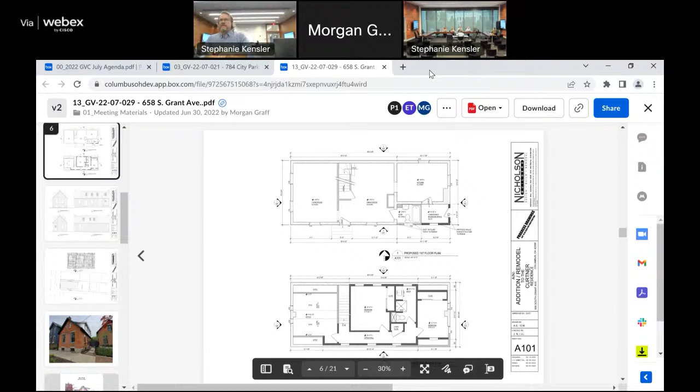Thank you very much. We need to go back to item number 3 and continue that one. Unless the applicant wants us to rule on it without them—can we rule on that without them? I've not heard anything from them specifically about it. I'm going to assume yes, but I can't say for sure.

This one is light fixtures, that is all—just light fixtures for three separate locations, and they're all smaller than the size of the existing ones, going into some locations. I think I'm okay ruling on it.